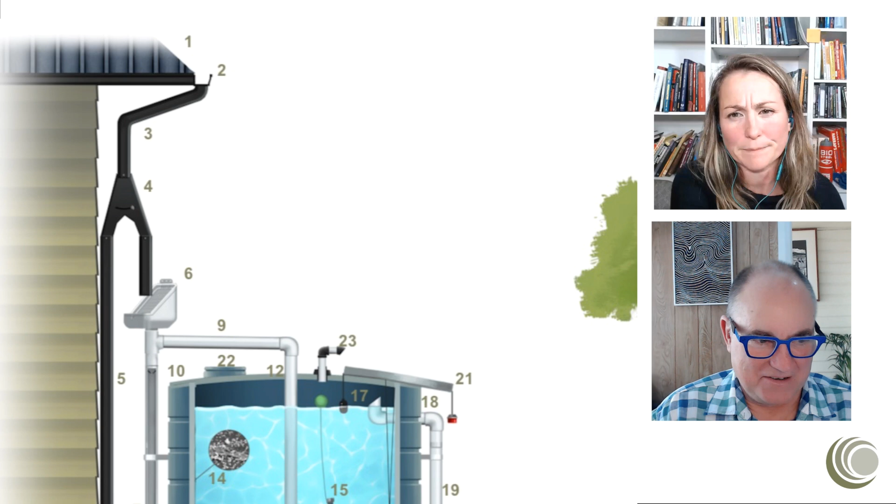Okay. So that doesn't become a block of ice. Exactly, exactly. So that's where you would see the diversion valve used in a system. And this would be different if the tank was underground below the freeze line. Exactly. Frost. If you had a frost protected tank and you were collecting water year round, then you wouldn't need something like that, right? So number six is a leaf diverter. And number seven is a first flush device.

Tell us a little bit more about leaf diverters. I know they're one of your favorite devices. People previously had only thought the screens were as good as the ability of the screen to entrap or capture material, but they actually work even beyond that by changing the flow characteristics in the downpipe. So why is it improving biological or

microbiological quality? It's because a lot of microbes attach themselves to sediments and debris. So if you take those sediments and debris out, you're also taking the potential microbial contaminants out of the water column. So, quite an interesting, underestimated process, but very significant results in our national surveys.

Then we have a first flush device, which are okay, but I'm not the fan I used to be of first flush devices because in our laboratory work and our field work, we found first flush devices greater than about 10 or 20 litres waste water but don't improve water quality. And you see these magic formulas that come from nowhere between roof area and size of first flush devices; there's no science behind them whatsoever.

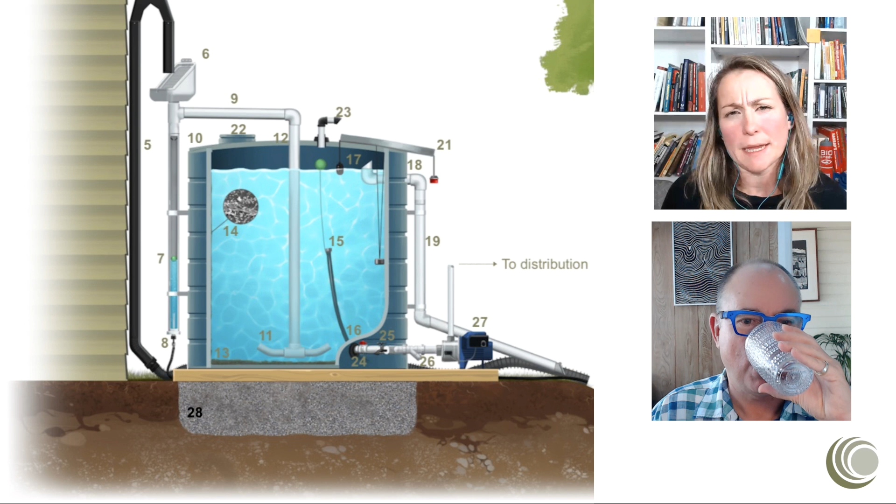We've found them really difficult to maintain, to be honest, and did put first flush devices on all of the first systems we installed. But after reviewing a lot of the research you had kind of thrown my way, I'd say I definitely err towards not using them in designs going forward, especially knowing what I know about the treatment train and all the other design strategies we can employ that I think are a lot more successful with less maintenance.

Well, in my own home, we avoided the first flush device, but we've got good leaf diverters. And if you have a leaf diverter just before all of your rainwater harvesting pipes, gutters, downpipes into your tank, so you've only got one of them rather than lots of them, they're easy to maintain, and they're very effective, potentially more effective than a first flush process. First flush can be good at removing sediments. There's been a range of other claims made about them; we haven't found that in our research.

Yeah, and we've just found that that drainage port, which is number 8 on the diagram, has really tended to get plugged up, and then it's not working at all, right? Like if you're not really on maintenance and making sure that you're taking out the port and letting it drain out, it just ends up getting plugged, and then you end up getting a septic column of, you know, not very nice water potentially being pushed into your tank. And that's a really good point.

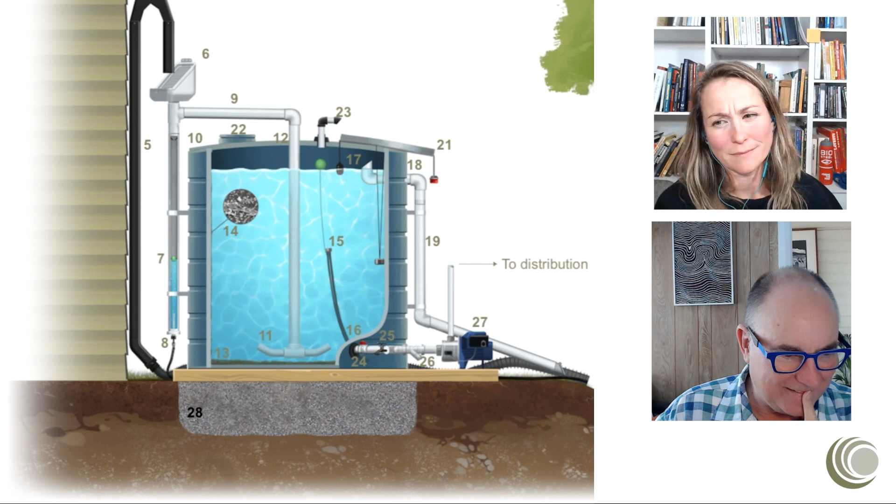15. Where are we? 15. Aha. So now we're going on to the intake in terms of where the water is pulled from your tank. That's the intake. And this particular diagram is showing one of those features that might be nice to have. And I'm really curious your thoughts on this, but it's a floating intake. And the idea with this particular design is that the ball at the top floats and keeps the intake in the center of the water column. Because, of course, as your water level goes down, your intake would stay about in the center.

So the best quality water in the tank is in the bottom, just above the sludge layer. So your inlet has got to be above the sludge layer, and that's what we design. There was a whole movement for a while that said, oh, no, we've got to have this intake floating somewhere near the top. But the higher you get in the rainwater storage, the worse the water quality is going to be. That idea came from Germany, and they're very precise.

And I remember lots of arguments with their German engineers. I said, well, why would you do that? Oh, no, we've assumed that you want to be nowhere near the sludge at the bottom. We're actually just above the sludge at the bottom, because the sludge is sticky and a very good thing. It cleans the water column. So just above it is the best quality water.

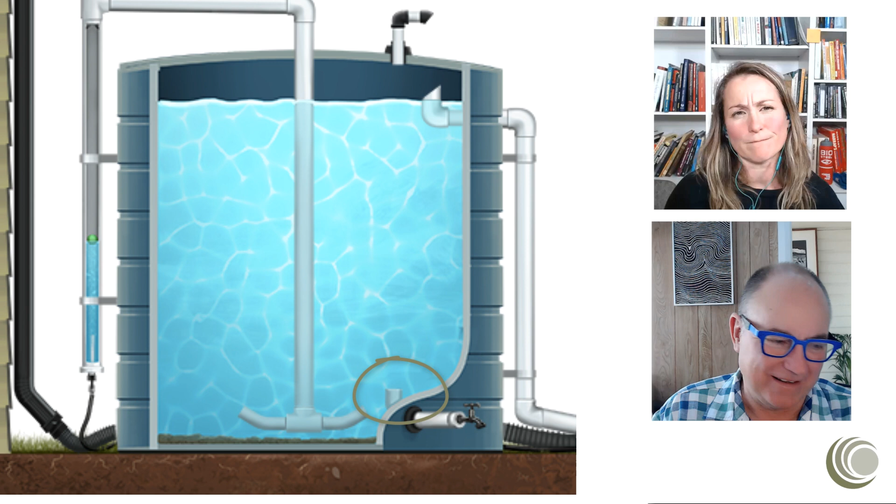However, there are all these things that are nice to have, but I would highlight that you should absolutely not harvest rainwater from near the surface of the rainwater storage, because that's where the water surface microlayer is. If there's going to be any contamination in the rainwater system, it would be very sticky to that surface layer, or it'd be drawn down into the sludge at the bottom, but it's bound in the sludge with other materials. On the surface layer, it's not.

What about the design idea of having your inlet water into your tank and your outlet as far away as possible on opposite sides of the tank? Would that be possibly a design strategy that would have greater influence over your water quality? This is what we do in our advice in Australia. So the diagram you're showing on the screen, if you're letting that water in close to the house, it's the opposite side of where the pump is. And what happens is any buildup of sediment, etc., happens the opposite side to where the pump draws water out.

And research from a young chap named Anthony Spinks showed just that simple change in design process dramatically changed the performance of the rainwater harvesting system. Wow. So little things make a massive difference. And little simple things, which is, I think, one of the big insights and epiphanies I've had over our time in our conversations. The rainwater industry has attached a lot of technical fixes that people can sell.

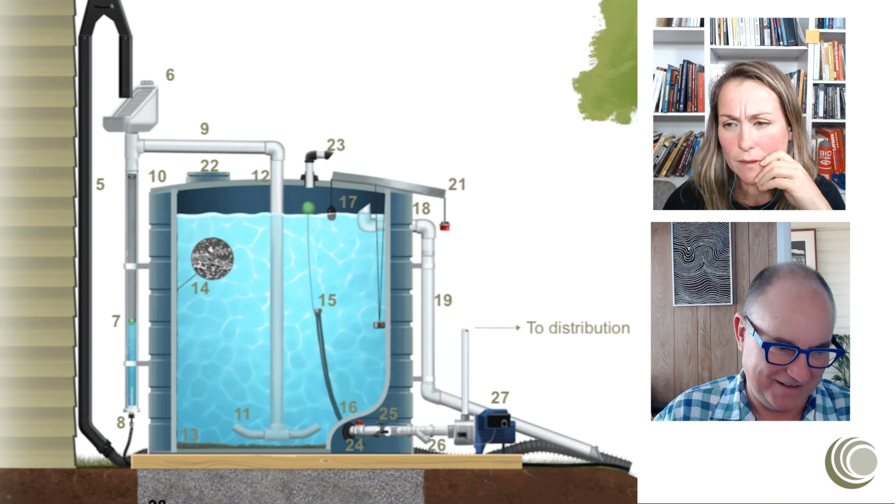So, what about 19? What's that thing, Michelle? Well, 17. The water will hit 17 first. Yes. And something that I've got drawn on this illustration is, I think it's referred to as a skimmer, right? Well, it's an overflow inlet, but it's the idea that if the pipe is cut at a diagonal, anything floating at the surface of the water will more easily be able to enter the pipe. So that's what's shown there. Yep, it's overflowing. And you're sending it via the pipe at 19 to an outlet at 20.

Exactly. And that outlet better be in a good place, Michelle. Very, very important and sometimes overlooked, surprisingly, right? In terms of how the overflow water is managed. And bringing it back to this big picture water resiliency, there's quite possibly a lot of water that's overflowing from your tank, especially in our climate where we get really large rain events. Most of us don't have tanks anywhere near enough to store the rain that would come in a rain event. So we're just holding some back.

And that overflow water is an absolutely valuable resource that can be put to productive use elsewhere on the property, whether ultimately you can think of your soil as one of your most cost effective water storing strategies. So I'm glad you mentioned soil, because nature's rainwater harvesting device is actually soil. It doesn't matter how big you make your rainwater storage on your property, lots of rainwater will still bypass your tank unless you live in Arizona with Brad Lancaster, for example.

So if you can divert your overflow to soil profiles and gardens and put that water back in the soil, it's a very beneficial outcome. Yeah, and the higher the carbon content of your soil, the more the water holding capacity. And there's a really neat upward spiral that happens when you start taking better care and stewarding and growing biology, right? You'll be able to store more water, and then you'll be able to grow more plants, and then you'll be able to store more water, and so on and so forth. So, it's fantastic.

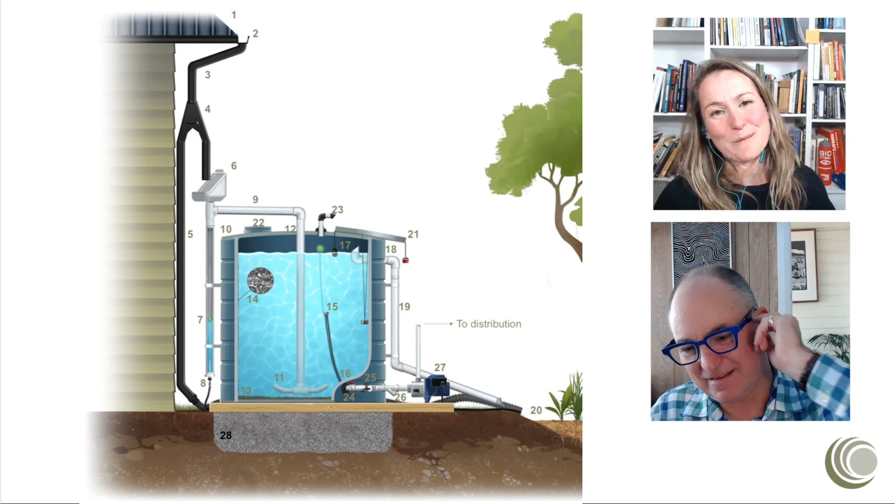Everything's very contextual, but to use a little solar pump to pump water up to higher elevation in the landscape, and then be able to gravity feed. We have a colleague in Australia who does that. His big rainwater storage is at the very lowest point of his house yard, his property. And he has a small one, he lives on the side of a hill, on the top of the hill, so gravity feeds his house.

So then he has a very small, low energy pump that gradually tops up his smaller one. Exactly. So, flushes his toilets by gravity and washing machine by gravity and so on. So you need to look for those opportunities in the landscape for sure. Absolutely. And all the reason it's really important to build a site plan and to really understand all your elevation changes across your site, right?

You're going to teach people about site plans. That's coming up, right? Okay, so what numbers have we not hit on this diagram? What about 23? What is that thing? 23. Well, let me just look in my book.

No, that's an air vent. Yeah, that's just the ability to allow air to replace the voidage, basically. As your water level decreases, you want to be able to bring air into the tank, and as it increases, you want to be able to vent air, right? We don't use air vents in Australia, but okay. Because we're letting the water in through 22, which is the

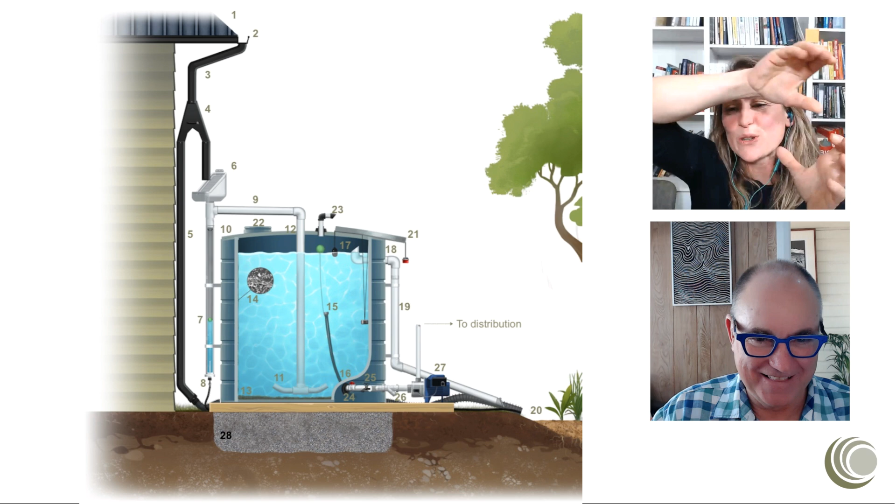So you would just have the conveyance piping come, and then maybe there'd be an elbow, and it would just be dropping directly into that little meshed inlet. Yeah, right, and the mesh of it is less than 1 millimeter mesh to stop mosquitoes and all sorts of things crawling in. And it's ironically quite a good part of the treatment train.

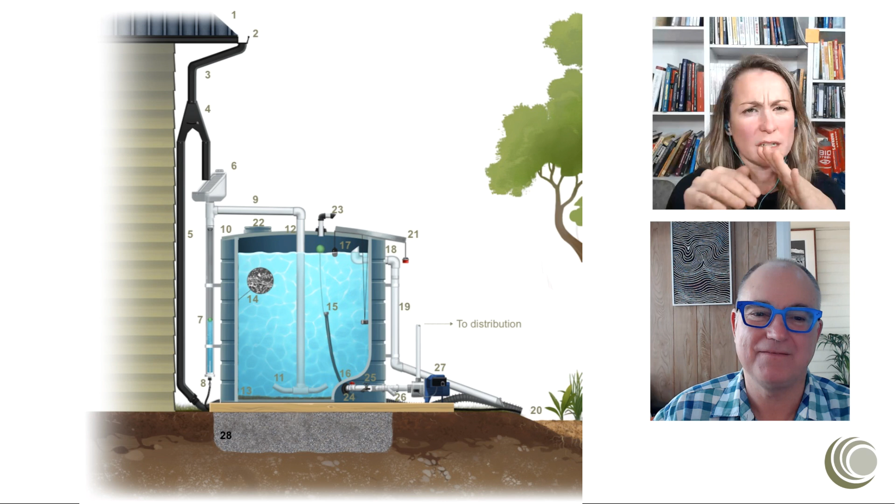Is that the same mesh like on the first flush diverters? Are those usually 1 millimeter meshes as well? Yes. Okay. So what you're saying? What happens is, when the water in that downpipe hits that mesh, you actually get less turbulence, and so the water's being calmed because it's actually passing through that mesh. Right. So that eliminates the need for an air vent. Absolutely. That's very logical to do it that way.

But if your storage is underground and it's completely sealed, which we found with bladder storages in Australia, because air can't access this completely sealed device, you very quickly get an anaerobic environment, and the base materials out of the walls of the bladder were being leached into the rainwater storage because of the anaerobic environment. So point being, it's really important for those tanks to be able to breathe.

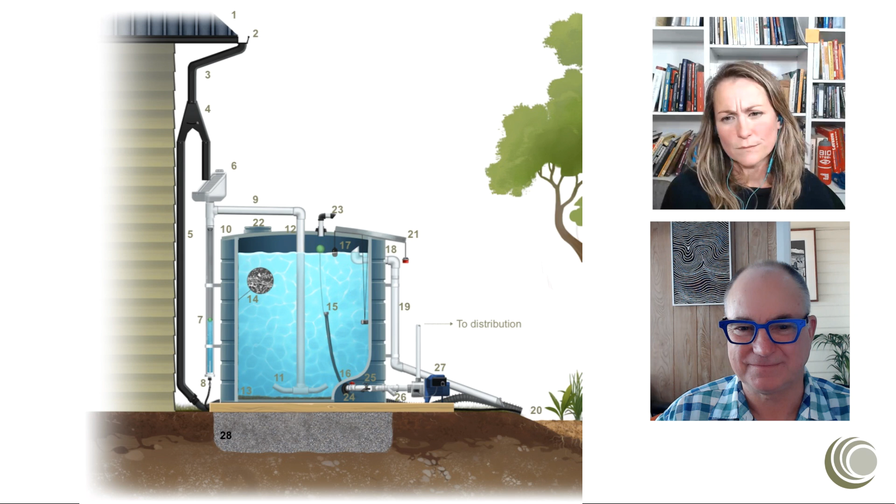Absolutely. If they're above ground, it's not a problem, but if they're underground, please don't make them fully sealed to air because they'll become anaerobic and things will happen. So then you'll need your air vent 23. Right. I think we've pretty much covered all of the essential components. Is there anything else you see here, Peter, that you can provide some insight or thoughts or perspective on?

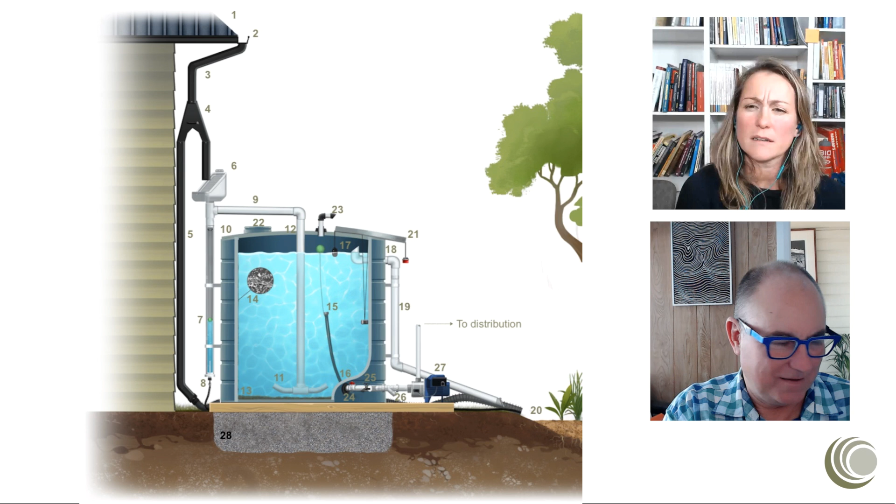No, I think you've got... Oh, you know what we missed? We didn't talk about 14 and 13. We've talked about them in the previous module as we introduced them as key concepts, but let's touch base on those ones again. Is 14 the biofilm on the wall? It is the biofilm, indeed. You can't buy one of those. Nature provides it, but it's an essential part, isn't it? And yet, sometimes you can't even see it, but it's there. So it's pretty cool you put that in there, Michelle.

It's the biological anatomy of the rainwater harvesting system. So the base materials in biofilms are usually soil bacteria because they're very stable, resistant to everything, and they build other materials around them. Then they develop what's known as polysaccharides, so very sticky materials. Biofilms are known as cities of microbes.

And then when they create a critical mass, you still can't see them, but then they get hungry. So they start eating materials that pass by, and heavy metals, other microbes, you name it, gets drawn into biofilms. So 13 is also a biofilm, but we call it a sludge. Both of those parts of the rainwater harvesting system are extremely beneficial. So we want to look after them.